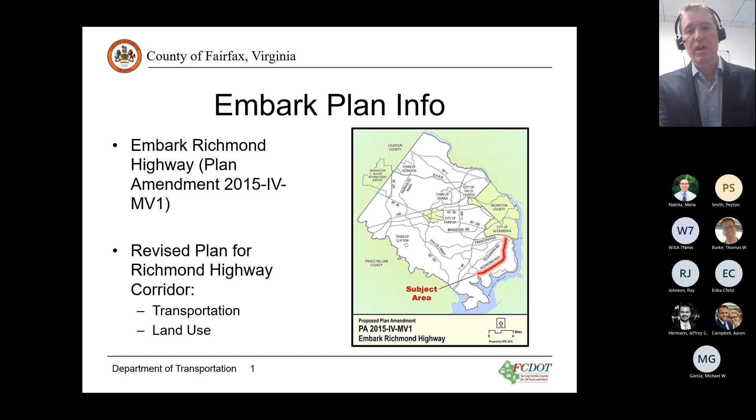We want to start by giving some background on where this project came from and what preceded it. Back in 2015, the Fairfax County Board of Supervisors authorized what has come to be known as the Embark Richmond Highway Plan Amendment. It revised and updated plan guidance for the Richmond Highway Area Plan, both for transportation and land use. On the transportation side, it included things like bus rapid transit, BRT, along Richmond Highway, as well as active transportation improvements in the corridor.

As part of that plan amendment, which was approved in 2018, there was a follow-on motion directing staff to develop a funding plan for the transportation infrastructure improvements recommended in that plan.

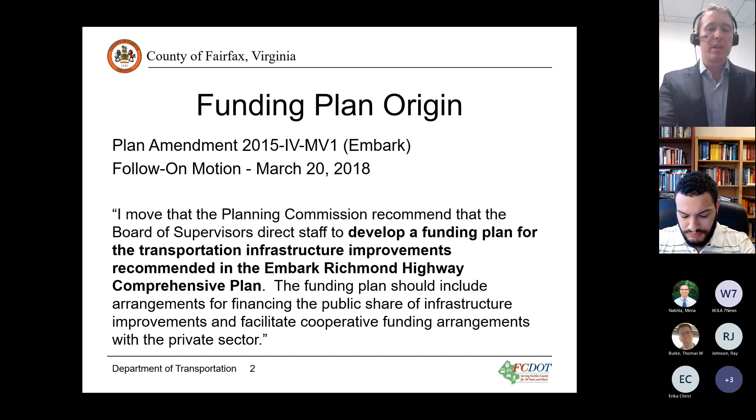Following that follow-on motion, staff has been working on a few things: first, identifying projects, vetting projects, and now doing stakeholder engagement to make sure we have the correct project list.

As part of the project identification, we started with the Richmond Highway Area Plan—that's where most of these projects are coming from. The graphic shown here may look familiar to people involved with the Embark Plan Amendment. This is the Penn Daw Community Business Center, and it shows a number of the recommended improvements from the comprehensive plan.

We also looked at the bicycle master plan and countywide trails plan, both of which have recommendations not just for this area but for the whole county, to see if any were relevant. Lastly, we looked for neighborhoods in the immediate vicinity of the community business centers, or CBCs, and the BRT stations, searching for missing sidewalks and missing links.

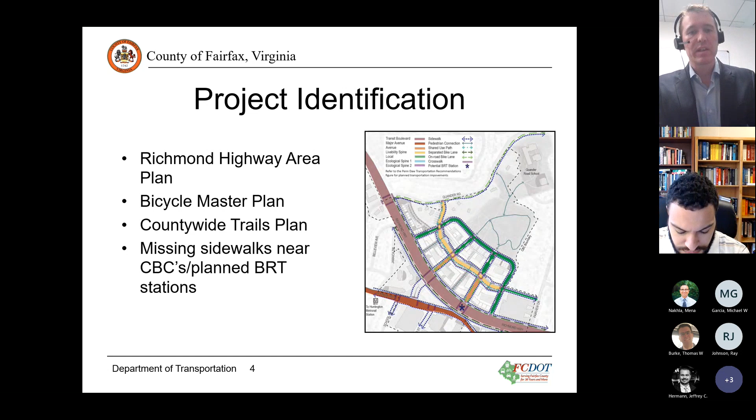So as part of the project vetting, we had some work where there were unclear or conflicting recommendations to try to reconcile those, figure out really what was the intent of the plan, what are the preferred improvements. We also vetted projects to make sure that they were relevant to Embark and relevant to this area.

And now we're at stakeholder engagement. So really what we're looking for is feedback from the general public on the overall concept of this funding plan and individual projects. If there are things that we missed, projects that may not be desirable to have on the list or may be difficult to implement, that's all feedback that we want to hear at this stage. Also hoping to answer questions if there are any, and ultimately to get at a more final version of this project list with everything we want and only that.

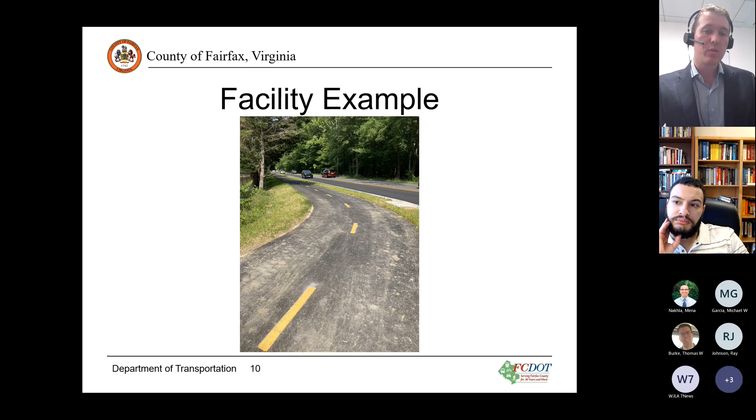This is a shared use path, also called a paved trail, a bike trail, anything like that. Again, the VDOT standard right now is for an asphalt facility that's 10 feet wide, and typically they don't have a striped center line, but this one does.

Another facility type we're going to talk about are standard bike lanes. You can see this is, again, they're all over Fairfax County. They are a painted on-road facility. Typically, they're intended to give cyclists a designated place on the road so that they are not having to jockey with vehicles.

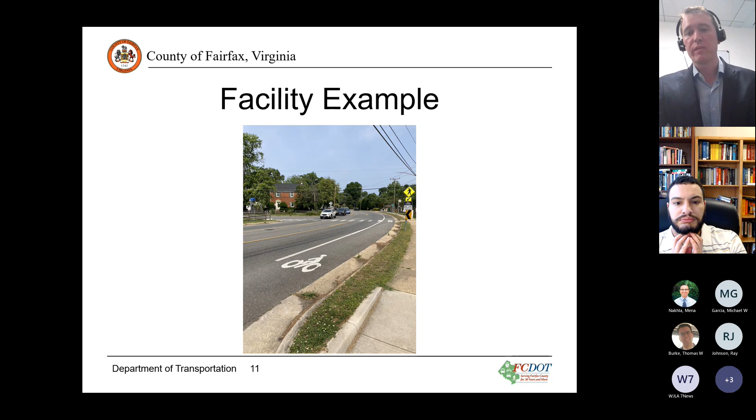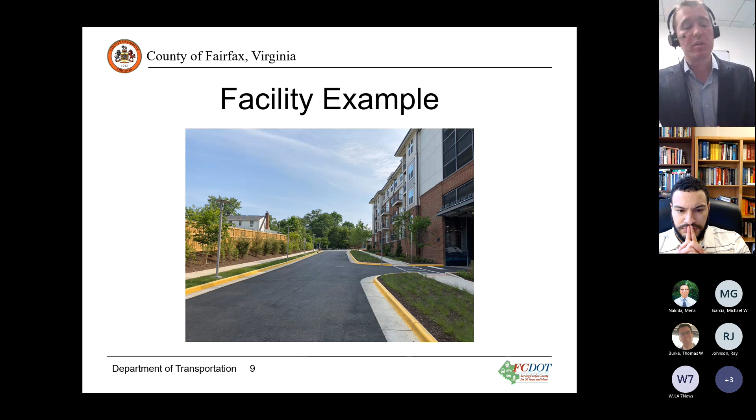And lastly, we're also going to end up talking about a grid of streets or grids of streets. Typically, what we mean by that is kind of an urban style facility. Yes, it can be used by vehicles, but typically there's also a sidewalk, a trail, a bike lane, some combination of those for active transportation users. And it's also in a more urban context. You may notice that the building here is pretty close to the sidewalk, pretty close to the road. That's not necessarily typical development pattern for Fairfax County, but that is kind of the vision for the community business centers in the Richmond Highway Corridor.

Okay, so now diving into the project list itself, we're going to start out with sidewalks.

Okay, go on to the next one. So we're going north to south. So the next one is Huntington Transit Station area. Again, just to orient people, we've got North Kings Highway right here and the Huntington Metro parking lot right there. And so that is intended to be the first station, the furthest north station of the BRT system. And again, in red, there's some missing sidewalk links identified.

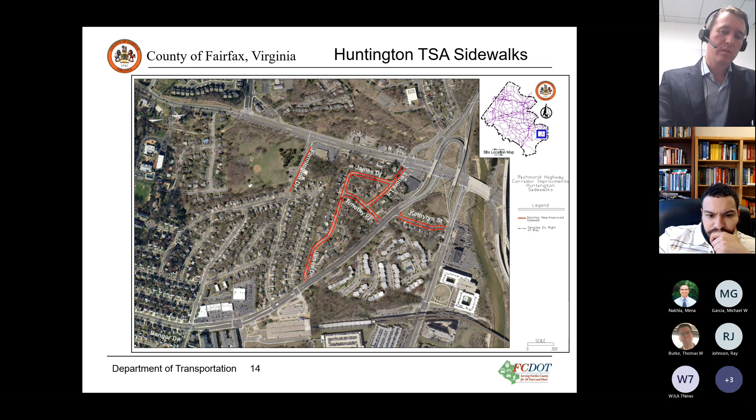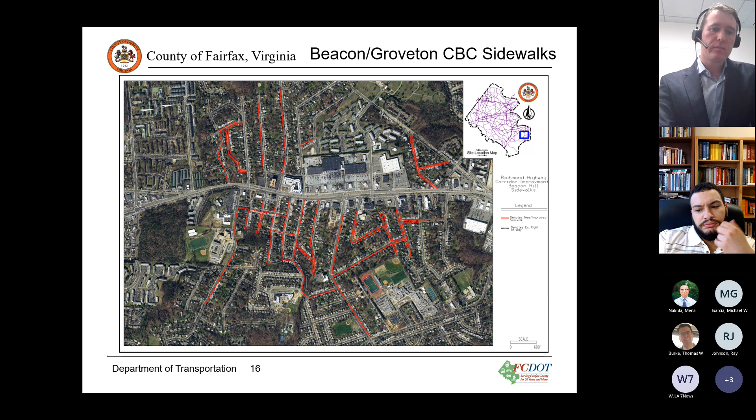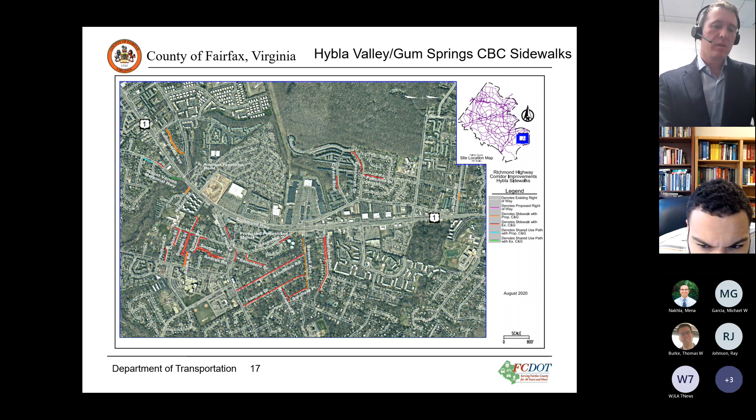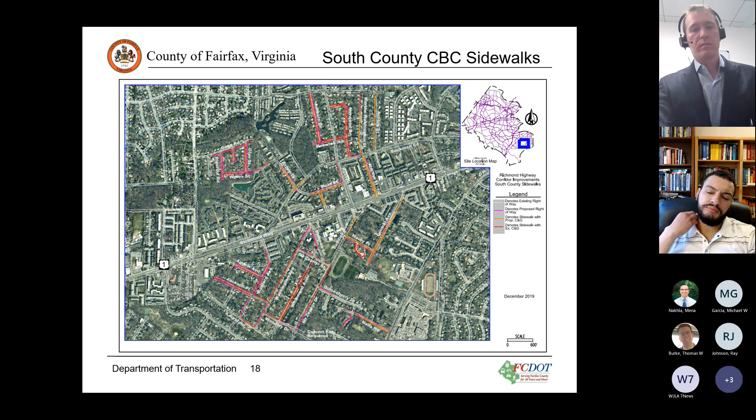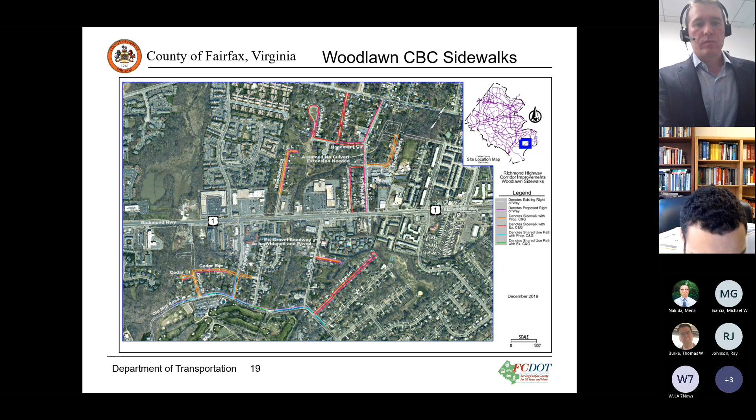Okay, so we know that was a lot of information, a lot of maps. So we're going to take a break to field any comments or questions.

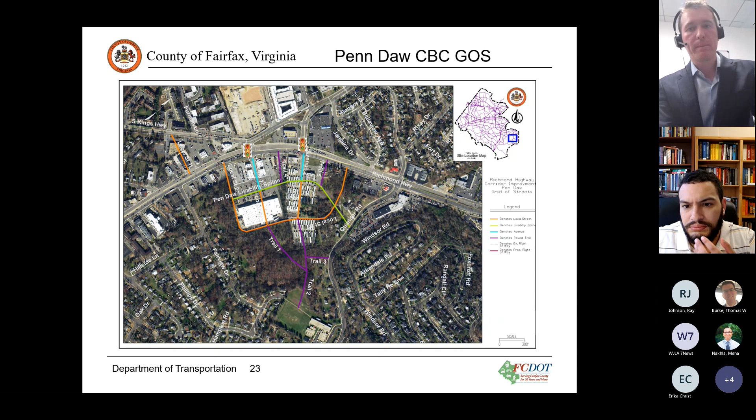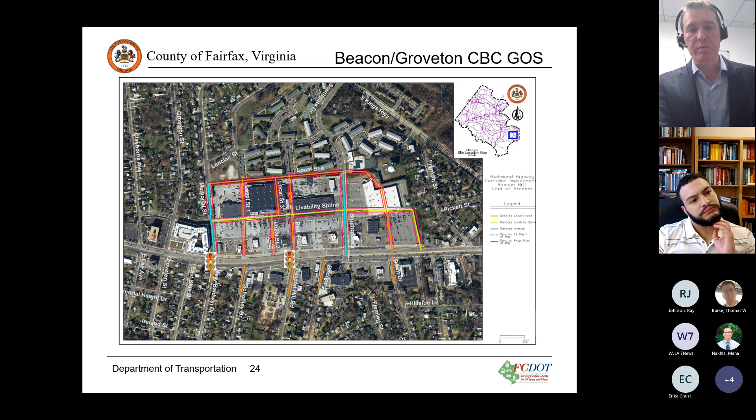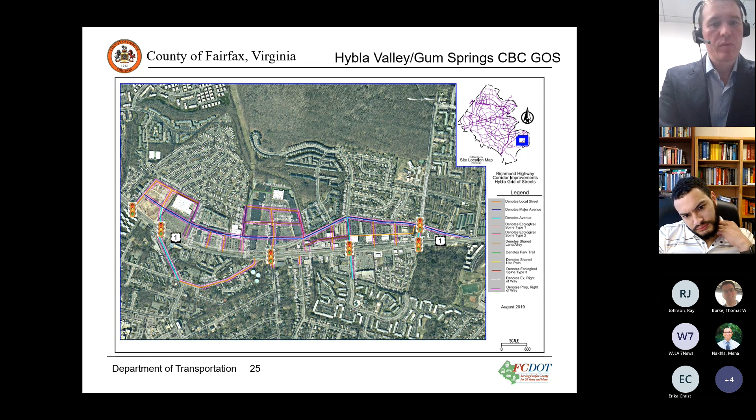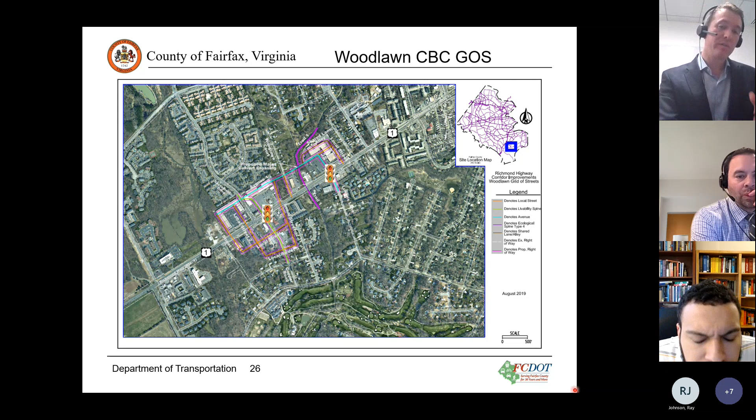And lastly, Woodlawn Community Business Center. Richmond Highway here, and Sacramento and Cooper here. It's also worth noting that some of these, including this facility, were included in the grid of streets, but they are actually trails. So not all of these lines indicate roads.

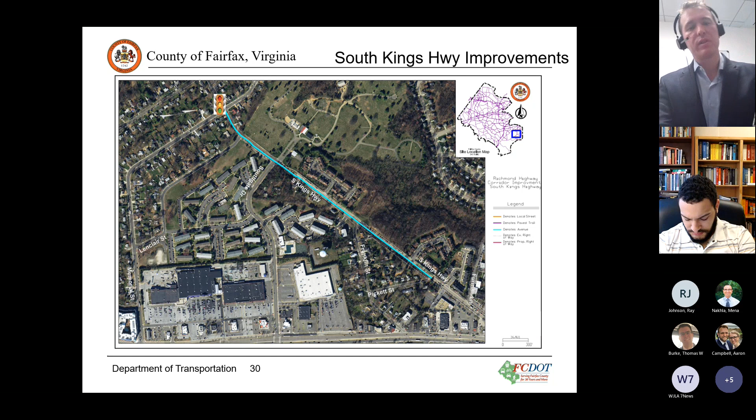Okay, the second trail is the Davis Street Arlington Drive connector. This is another common type of facility that you see in the county, kind of a cut-through trail that connects 2 roads that otherwise don't meet, providing an active transportation connection without extending the full road. This recommendation is in the bicycle master plan.

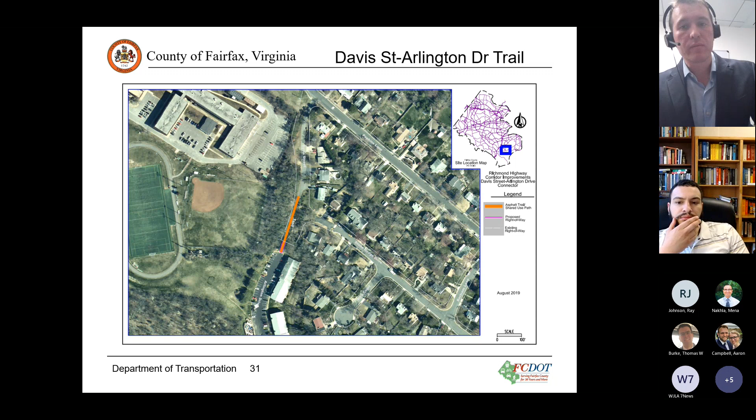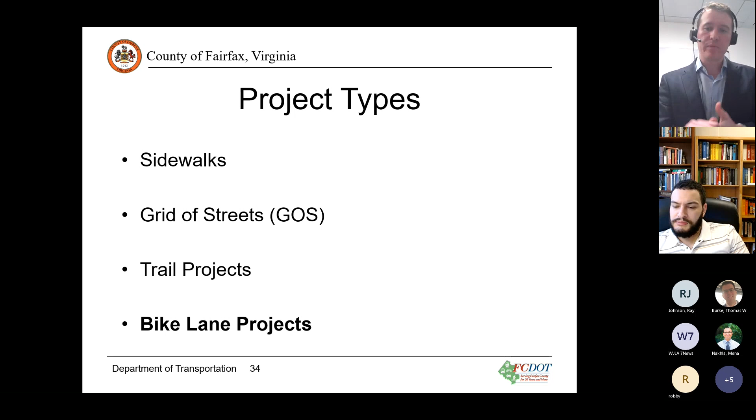Okay, and then lastly, we want to share a handful of these bike lane projects. Like before, we're just going to look at 3 of these for the sake of time, but there are more on the website.

One thing worth noting with these bike lane projects in particular is that in some cases they could be built entirely or mostly within existing right-of-way, depending on what the community preference is. If there's a desire to preserve existing parking or something else currently using up space on the road, there could be a need for additional right-of-way. So there are some options within these.

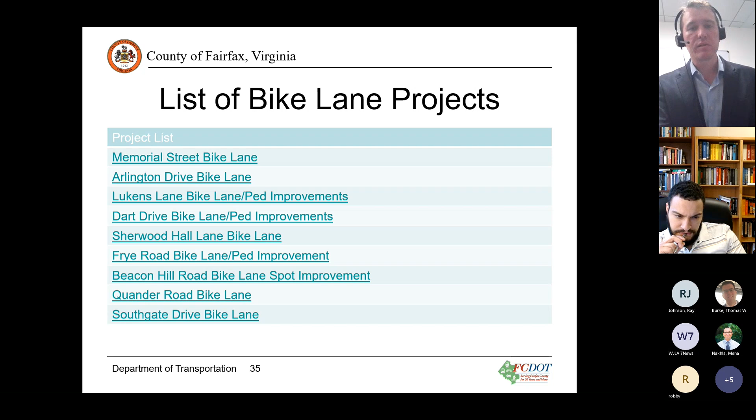Okay, so the first one of these is Memorial Street. Again, we're showing a connection, a facility from South Kings Highway to the boundary of the Beacon Groveton Community Business Center. This recommendation is in the Richmond Highway Area Plan and the Bicycle Master Plan.

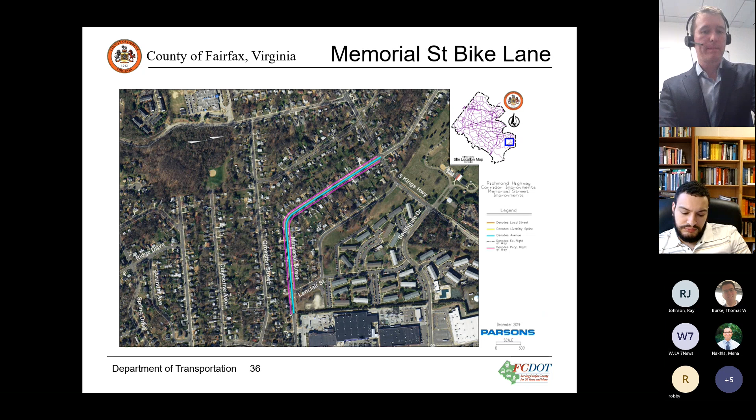This facility is on Arlington Drive, from the connection with Dart Drive down to looping around back to Richmond Highway. This is a recommendation in the Richmond Highway Area Plan.

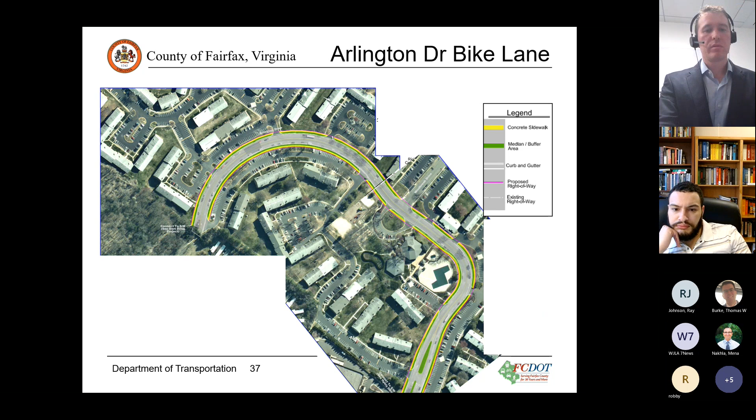And lastly, this bike lane is shown for Lukens Lane, from Old Mill Road to the edge of the Community Business Center. Unlike the previous 2, parts of Lukens Lane actually don't have curb and gutter, don't have sidewalks currently. So this project would add the bike lane, but also fill in those facilities.

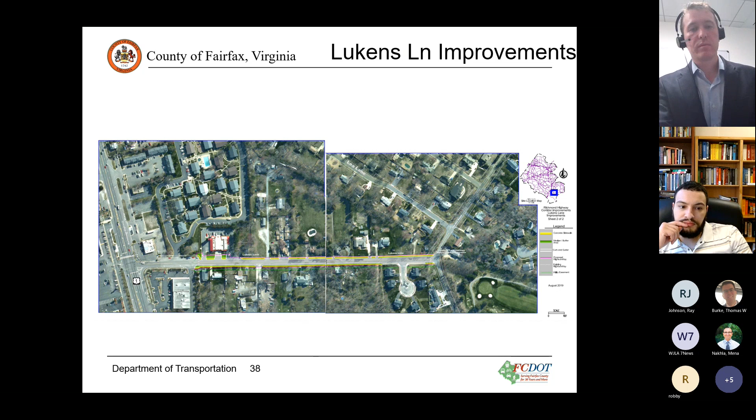Okay. All right, Zach, if there's any questions on those particular bike projects, if not, we will go ahead and go over the next steps so that we can take comments on all aspects of the presentation.

Okay, so we did want to share these additional resources. On top is the project webpage - you can find all of the project sheets for all of the projects there. Also included is the Richmond Highway Area Plan, which, like Mike mentioned, has more detailed information about the transportation recommendations in each of the CBCs. And the Bicycle Master Plan and Countywide Trails Plan, which both have countywide recommendations, but ones that are relevant to this effort.

Okay, and so we do want to open it up for general questions on all of the projects. If you have comments after this meeting, you can reach out by email, you can reach out by phone, you can comment directly on the project webpage - whatever's easiest - but we are looking for comments by June 16th, Friday.

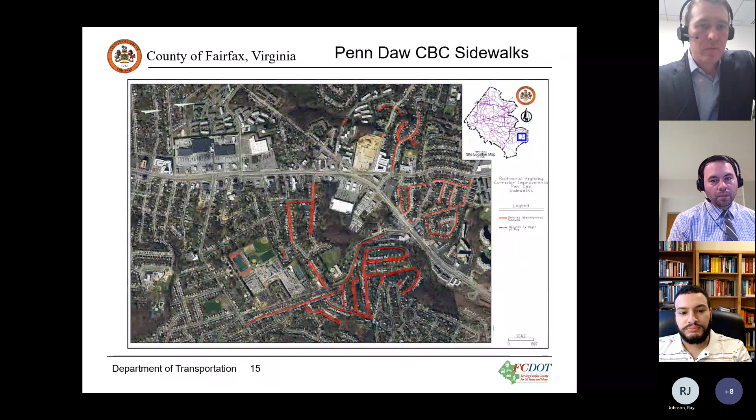Zach, would you mind scrolling to the slide and we can address it from there? Sure. Okay. So I will need to double check the project page on the website, but...

I believe that this line is actually indicating a shared use path, a paved trail, rather than a concrete sidewalk - so hopefully that addresses one half of the question. But the other half, for these missing links, we had an informal cutoff of a quarter mile around these community business centers. We really wanted to focus on those facilities that would be moving people to the community business centers. We didn't want them to be too far afield and kind of lose that relevance to the Richmond Highway corridor. And so that's why the cutoff was made where it was.

If that's something that we need to reconsider, look at again, we can definitely do that. Well, I'd say as you guys know, there's already a 4-foot cycle trail that was put in as part of an agreement to expand the country club, I believe in the early 2000s, which is in fairly rough shape currently.

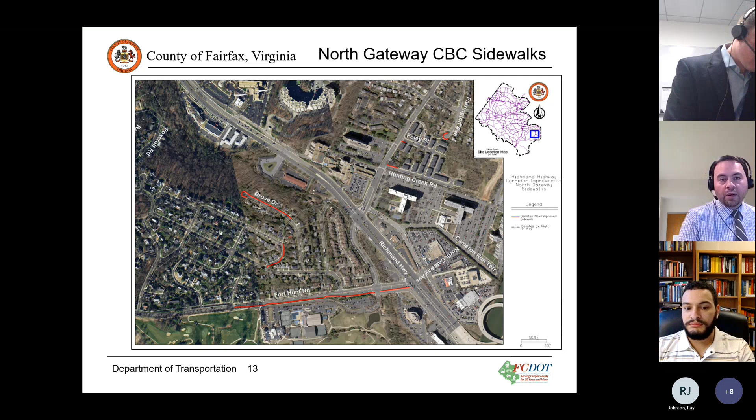And then from anyone from the public as well, if there's any sort of questions about where these came from—obviously a lot of them are derived from the comprehensive plan. That's kind of our basis for having this, and a lot of what's put in the comprehensive plan is done through public input. So we're taking that public input, putting these projects together, and hoping to develop a funding plan for it.

Just to remind everyone, the next step for us is to evaluate these projects under a cost component, which will allow us to create whatever amount the whole totality costs. Then from there, we can look at various funding options that could help implement these projects over the course and life of the comprehensive plan. So it's not that we would do all of these immediately in the next 10 or 15 years—they would need a funding plan to take time to develop enough money to put these projects in. So it'll take time through that.

In addition, these projects always change a little bit as they go through additional evaluation and engineering. Utilities or other kinds of drainage could change the project slightly and make them vary one way or the other. So this is not at that level yet. That level would take place at the next point, as these start to go through preliminary engineering, design, and construction.